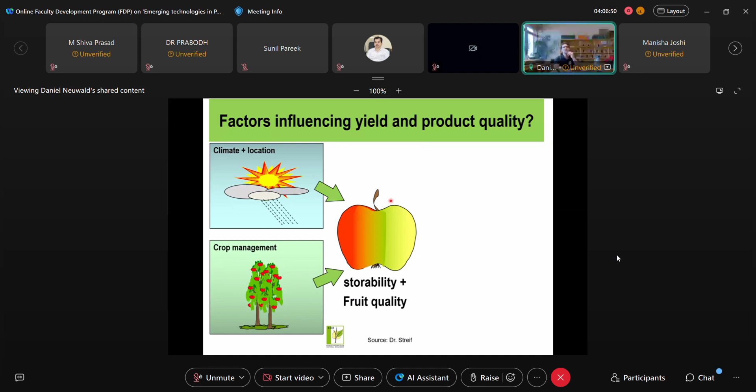What influences the fruit quality is the crop management, for example pruning, fertilizing, etc. This is a point I will not come into details about.

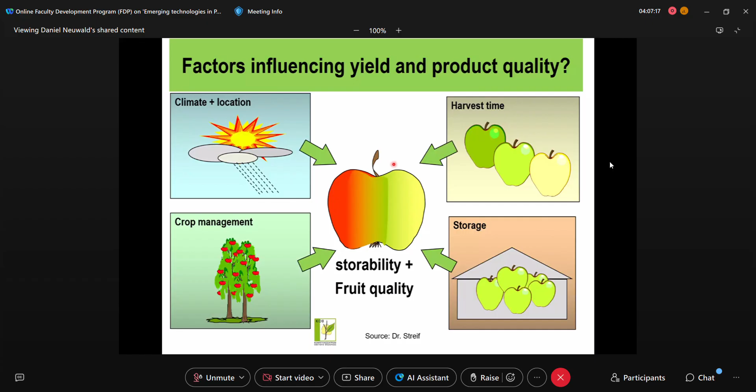The other point that is very important, and that I will touch a little bit on in the next slide, is the optimal harvest date. And the point I will concentrate more time on is the storage condition. The optimal harvest date is essential for fruit quality and storability.

To understand the optimal harvest date, we have a connection between two lines: that is the fruit quality. If we delay the harvest date, this curve increases, as you can see here. On the other hand, if we look at storability, if you delay the harvest date, it will decrease. And here is the open question.

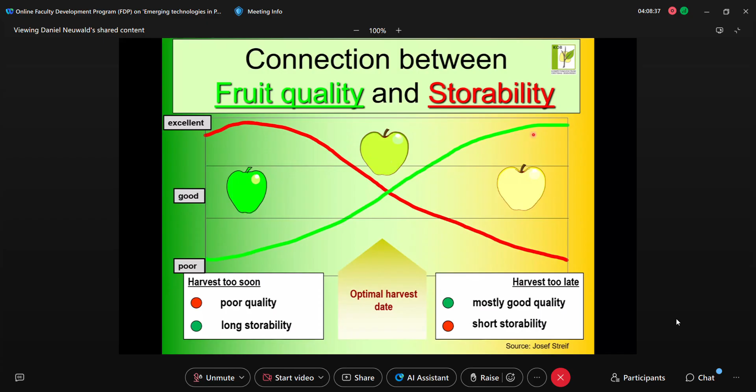What we like to make with our product is processing, then storability is not so important, and we can delay the optimal harvest time. On the other hand, if we like to store the product to have fresh fruit during the whole year, then we need to find a compromise between these two lines. The optimal harvest date is this compromise, depending on what we like to make with our product.

For apple, we have different parameters that we can use to determine the optimal harvest date: firmness, the starch pattern, and also the total soluble solid content. There are other factors, but I concentrate on these three because from these we can calculate the Streif index. This index is mostly used here in Europe, and is the firmness divided by starch pattern divided by total soluble solids. The lower this value, the riper the fruit.

This value can vary a little bit between year to year, or to region. But if you calculate this index, you will get more constant results than if you use individual parameters.

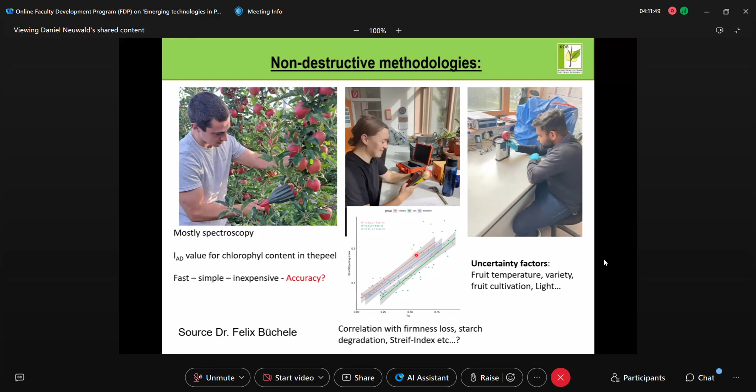The factors that we can change during storage can reduce this process. If we use low temperature, low oxygen, higher CO2, we can reduce the synthesis and also the reaction. We can also use MCP, which is a blocker of the ethylene receptor, but I will not go into detail on this point.

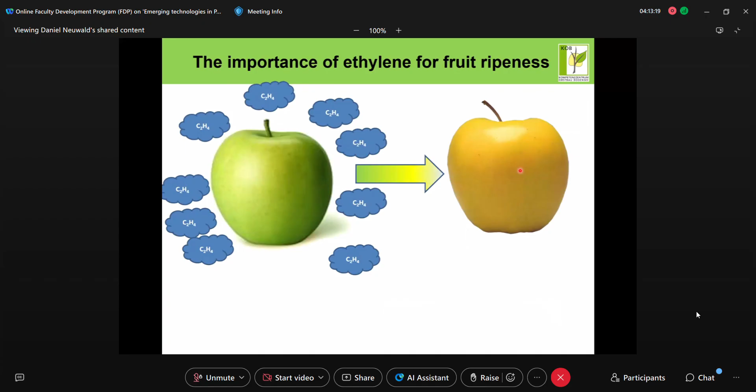Here you can see one illustration in my slide about the importance of ethylene. Ethylene is a plant hormone that is produced by the fruit, and if the fruit produces this ethylene, then it will ripen the fruit. What is important is the timely harvest and appropriate storage conditions that delay the synthesis and action of ethylene.

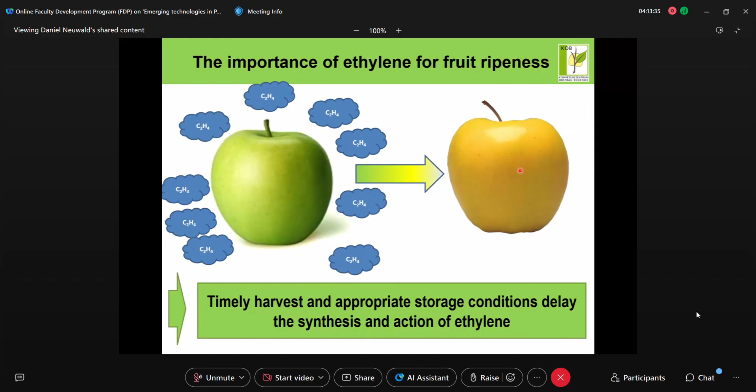Now we come to the topic I'd like to explain in the next slide: fruit storage. To start, I'd like to remember that apple is also a living product after we harvest the fruit. The apple can respire, produce heat, lose water, fall ill, and die. The activity in post-harvest physiology and technology is to reduce this process and to maintain the best fruit quality possible by reducing this process we see here: respiration, heat production, etc.

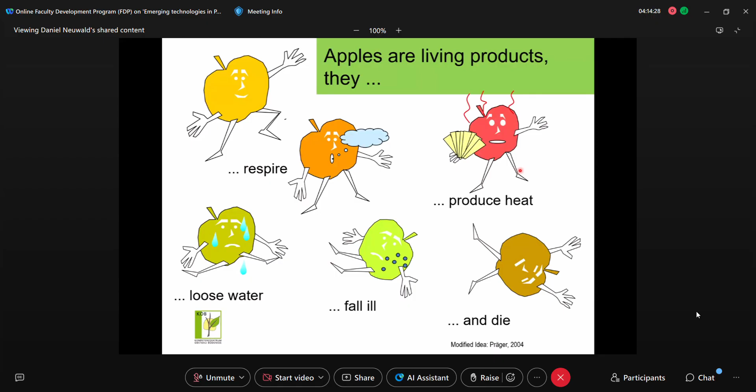What are the storage factors influencing storability? I told before that we can use, and for me the most important is, the appropriate temperature.

Additional to the temperature, we can use ventilation and humidity or humidification. These factors have an interaction with the water. And additionally, we can change the atmosphere: reduce oxygen, increase carbon dioxide, in some cases eliminate the ethylene, or use the ethylene blocker 1-MCP, or, I think the program will also talk about jasmonate, but I will not talk about it in my presentation.

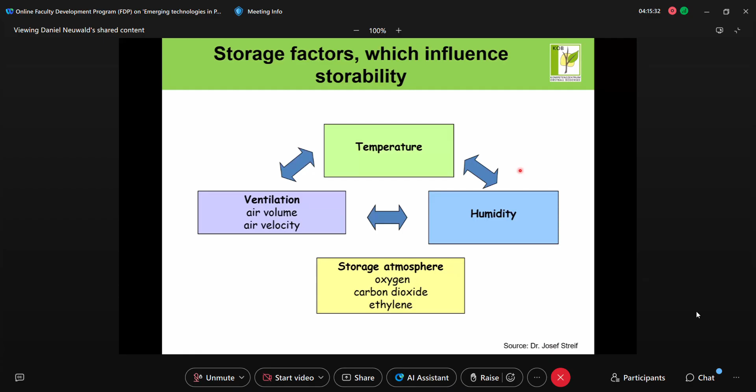Which of these factors we use depends on the time that we like to store. Because if I store the fruit only with cool storage and don't change the storage atmosphere, then I can store a maximum of 3 to 5 months, depending on the variety, if it's apples. For longer, we need more.

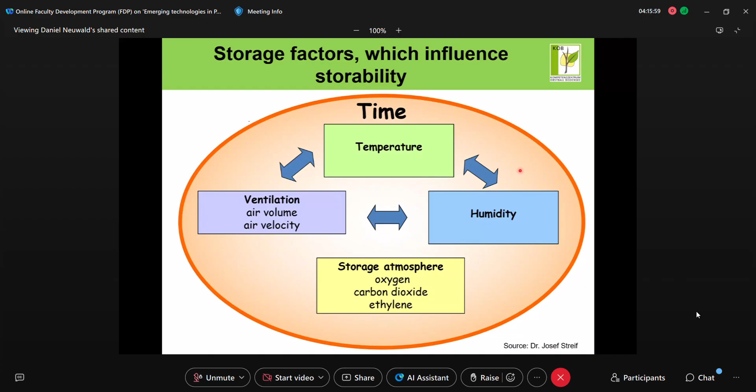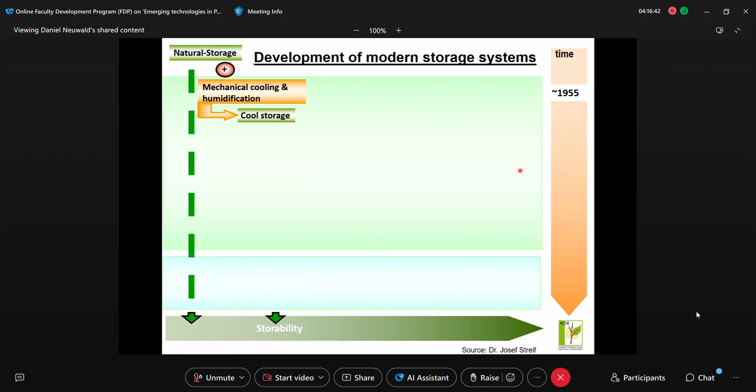Here I tried to show the development of the modern storage system. If we think of our ancestors, they also stored fruit or vegetables based on empirical results, and it was natural storage in the room that had the coolest temperature, or some place that tried to keep this fresh temperature. Then we have one storability. Around 1955, we have the development of mechanical cooling and humidification, then cool storage started. And you can see here, it improved the storability.

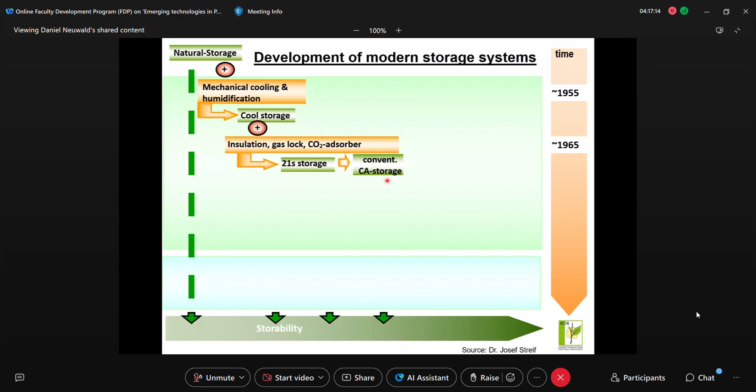Some years later, 1965, with improved insulation, gas-tight rooms, CO2 adsorbers, we have the conventional CA, classified as 3% oxygen, 3% CO2, then we can improve the storability of this fruit more. Then around 1990, with the development of nitrogen separators, electronic measurement and control devices, we get ULO, the ultra-low oxygen storage.

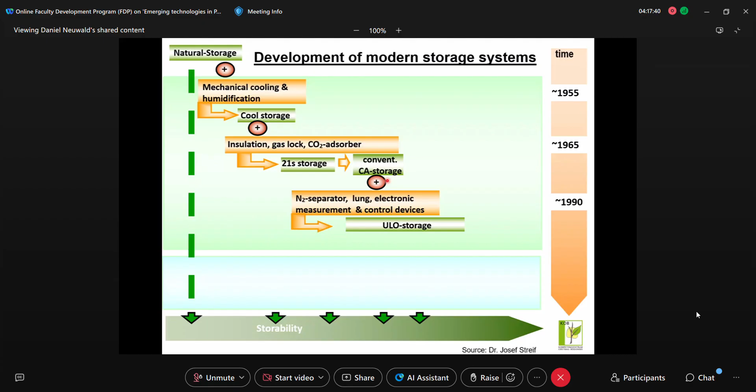Until now it was only static storage conditions. After 2005, we have the dynamic. We try to make an interaction between the fruit and the management of the storage facility. And for this, we can use ethanol or chlorophyll sensors, respiratory quotient, or CO2 measurement. And this is the dynamic controlled atmosphere, which I will go into more detail on in the next slide. With all of these methodologies you can also use 1-MCP, which can reduce the synthesis and the action of ethylene.

I said that the most important is the refrigeration, and here in Europe we have a change in the rules, and we need to evaluate refrigeration solutions that have low global warming potential. That is CO2, propane, and ammonia. I think you have one more synthetic product, but this is also with freon, and that is more damaging to the environment. And this is what the European Union wants to reduce.

And what we do in this project is compare the different systems, CO2 and propane, to the regular one used in our region, that is freon with 134a. We have different rooms here, and each room has a different system to see how the quality is maintained and also the cost of energy, maintenance, etc. CO2 is a very interesting refrigeration solution, but for very low temperatures. In the range for apple storage, from 1 to 3 degrees Celsius, it is not the most appropriate, and this we have also investigated. Propane and ammonia need to be used with indirect cooling, and this also loses a little bit of efficiency.

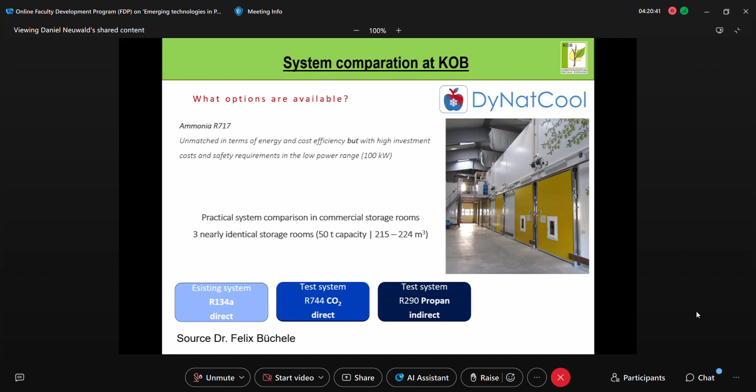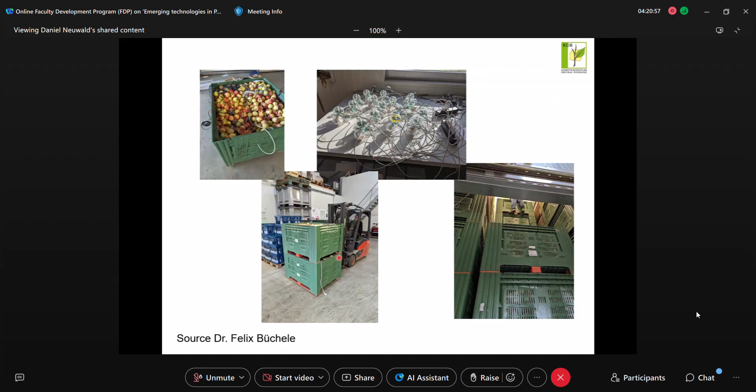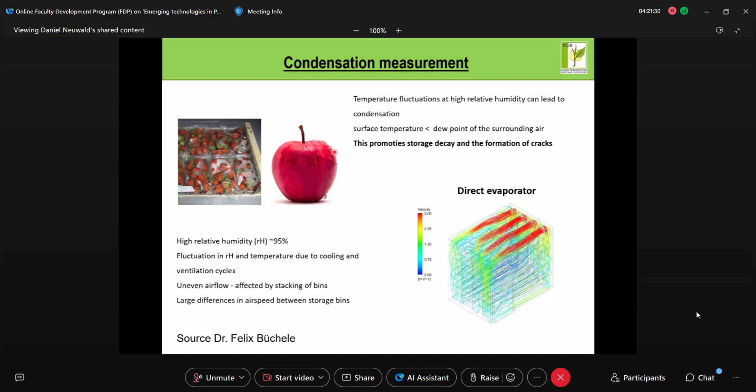Yeah, in this project, just to see, we have a lot of sensors. You can see how much activity we need to do to get all of these results and comparisons. And here, one aspect that we also investigate is condensation measurement. We have fluctuation in the temperature, and with very high humidity water can condense on the fruit, and this is an appropriate condition for the development of fungal disease, and this needs to be reduced. It is also an effect that we tried to investigate in this project. Here, just to see how creative research needs to be, the best sensor is to use the apple as a wetness sensor, with fruit surface temperature, ambient temperature, air speed loggers, and here you can see how we did it in this project.

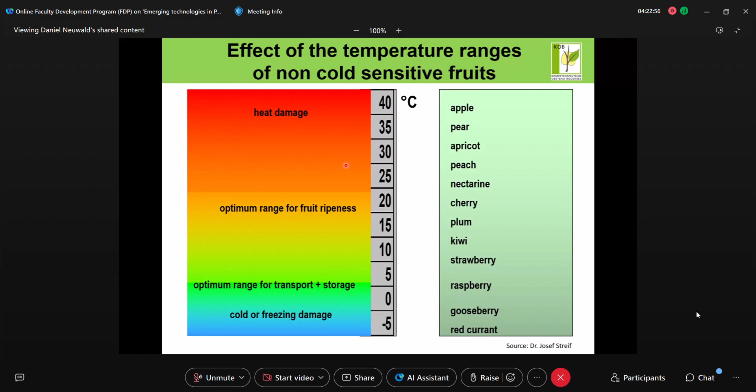Yeah, the effect of the temperature: we can look at the appropriate temperature, but what is an appropriate temperature for non-chilling-sensitive fruit? Here I put a list of non-chilling-sensitive fruit. What will happen if we store the fruit around 40 degrees Celsius? There will be heat damage. If we store between 15 and 20 degrees Celsius, that is the optimum range for fruit ripening. 0 to 5 degrees Celsius is the optimum range for transport and storage. And if we go further down in temperature, then cold or freezing damage can come.

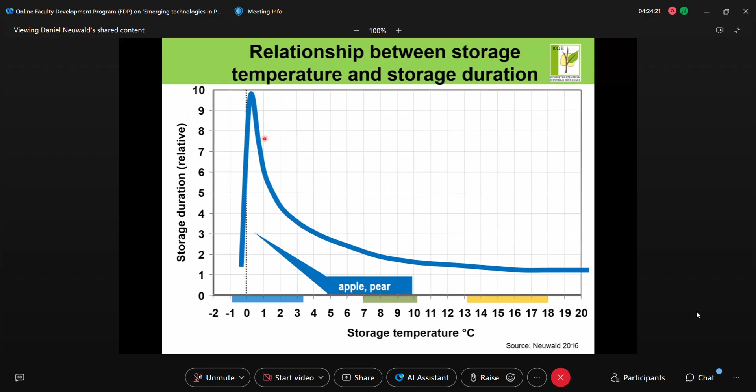Here is the relationship between storage temperature and storage duration. If you reduce the temperature, for example in apples and pears, you can see that it increases the storability of this fruit until one point, that is the maximal point, and then it falls down because it starts the chilling damage or freezing damage.

For fruit like guava and avocado, it is a similar curve, but the appropriate temperature is around 7 to 10 degrees Celsius. For mango and banana it is higher, but also a very similar curve.

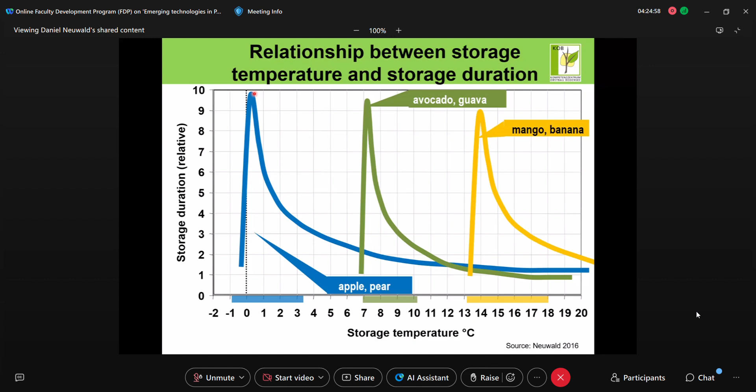What is necessary to use controlled atmosphere, which is the technical equipment for a CA room? First we need the fruit, which you can see here. We have here the ambient condition, around 21% oxygen, 0.03 or 0.04% CO2, and the rest is nitrogen. We need a refrigerating and cooling system.

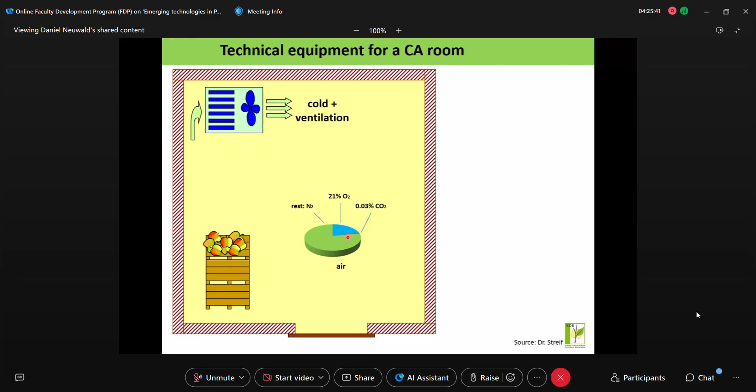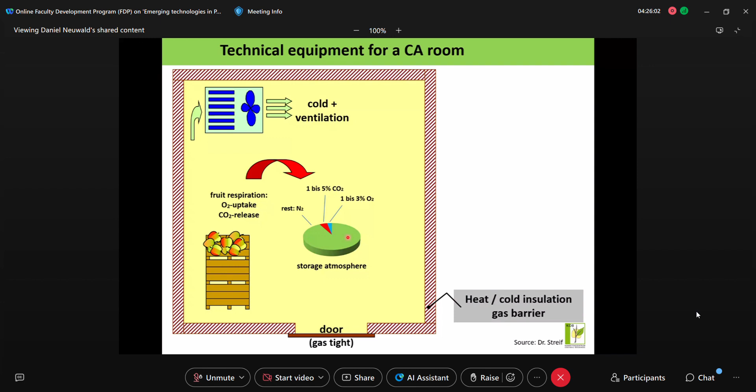Also the fruit respires and changes the atmosphere, and here we can see that we need gas-tight doors, heat and cold insulation, a gas barrier in the walls and in the ceiling or floor. We need some measurement instruments like oxygen and CO2 gas analyzers, sensors like humidity and temperature sensors, the valve and lung for pressure compensation, because if we cool, there will be a depression.

And if the fruit gives off warmth and the air increases in temperature, we can have a higher pressure that can implode or explode the room. The lung is also one part where we can save the air from the room, so that if you have this expansion or compression, the air is saved in the lung before the fresh air comes in.

The fruit will respire more than the optimal condition, for example 1 to 3% or 5% CO2; if the fruit respires more, the CO2 that is produced in excess needs to be absorbed. And also the nitrogen separator, to reduce the oxygen or to maintain a little bit higher pressure, is necessary in some cases in DCA.

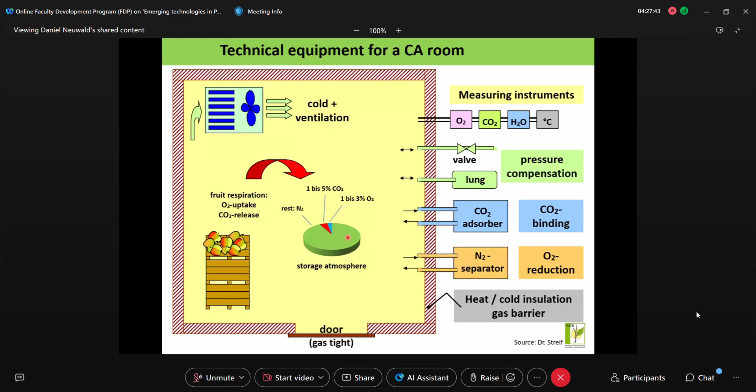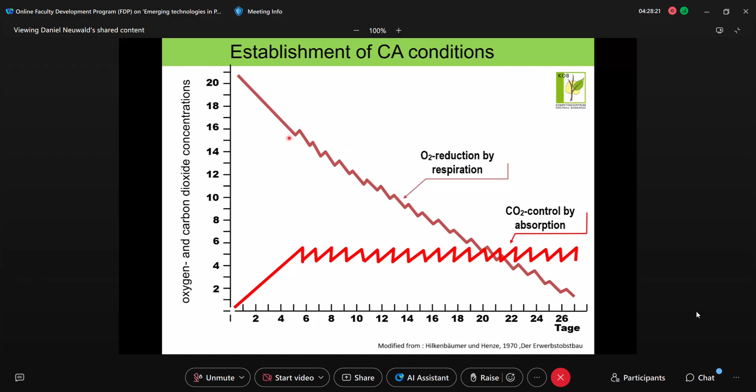Here you can see the establishment of the CA condition if the fruit goes only by respiration, and you can see that it will have a duration of around 26 days. You see this behavior in the line because when the CO2 absorber starts, every time a little bit of oxygen comes into the room. If we have the possibility to make the pull down with the infusion of nitrogen, we can reach the optimal CA condition in around 1 week.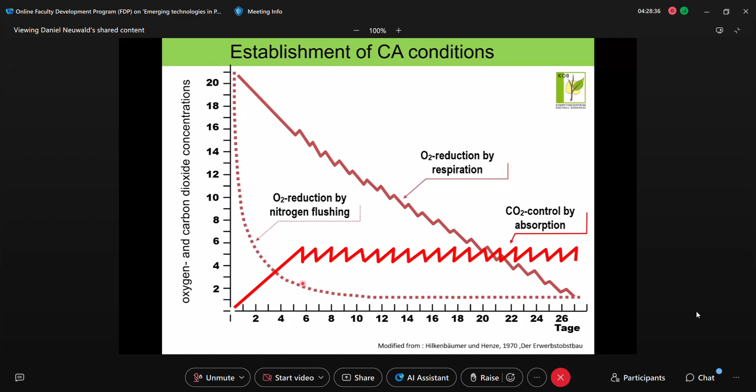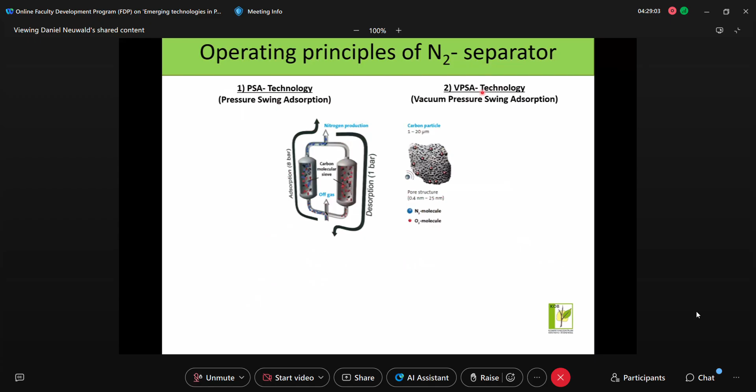Here, how do we produce this nitrogen? We can get the nitrogen from the atmosphere and separate the nitrogen from oxygen and also water vapor. We have the system with pressure swing adsorption, or the second system is with vacuum. A third system is membrane separation, where the air comes in here, the nitrogen is retained by the membrane, and the oxygen and CO2 can go outside the membrane.

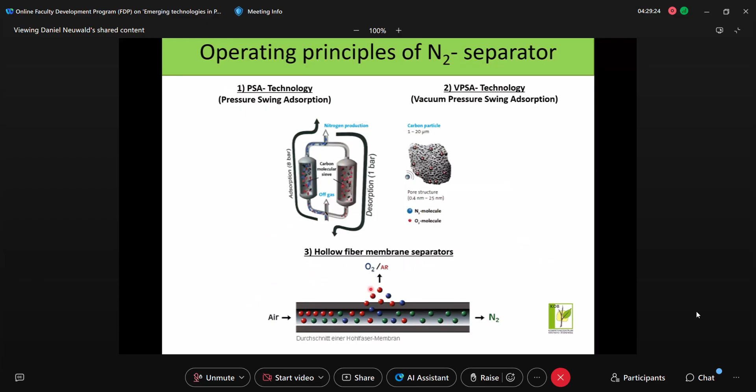Here maybe you can see, I hope that you can show it, no.

Here is how it works: the air comes with a higher pressure, 8 bar, then it is separated and the oxygen is retained in the carbon. And here we have the nitrogen production that we can inject in the room. Then this carbon will be saturated, and the system changes. Here it will be with low pressure and here with higher. Then this one will be regenerating and the second system will produce. You can see the oxygen that was in this column comes down and out here.

The similar process is also in the CO2 adsorber: CO2-enriched air comes here from the storage room, the CO2 is retained in this column, and then fresh air comes out here.

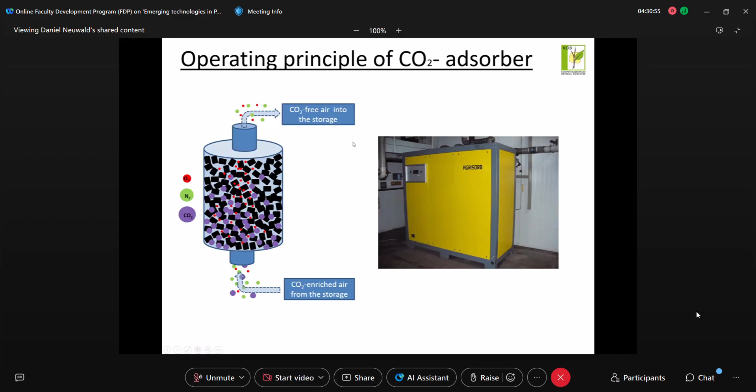One alternative system is to use hydrated lime, and the disadvantage of this method is that at the end of the storage, we have the lime as waste. Just to give you an idea, it is recommended to use 2% of the volume of hydrated lime; for one room with 100 tons of fruit, you need to put 2 tons of lime. Maybe you can later use it as a fertilizer, but you will need space that normally would be for fruit to put this lime, which absorbs the CO2 so it doesn't damage the fruit.

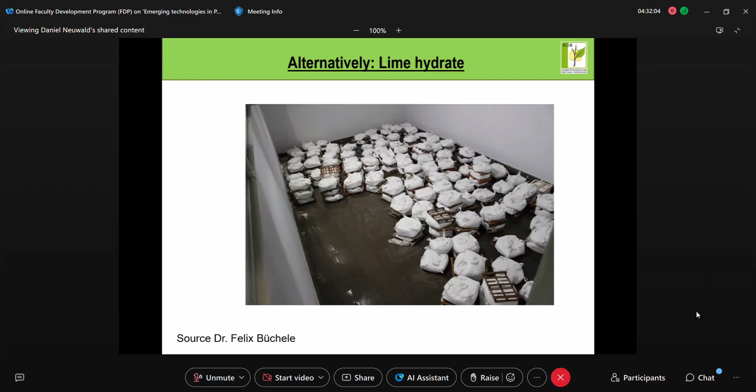Here I tried to show what we need in one modern CA storage with engine room. Here is the room with different sizes from 15, 16 and 100 tons. Here you need the air compressor, the tank for air, the PSA, the CO2 adsorber, the gas analyzer, and here the compressor for refrigeration.

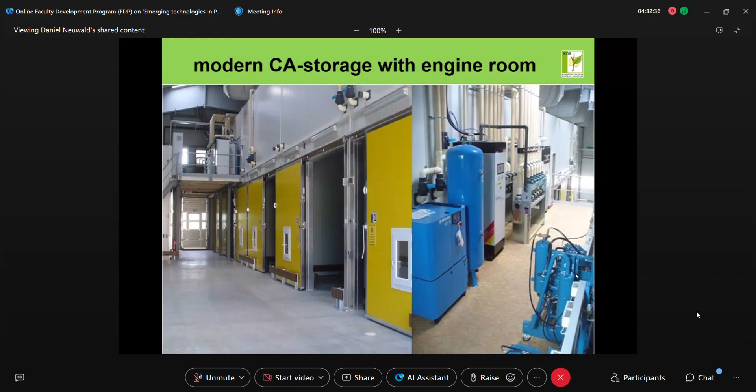One very important thing: for fruit, we can reduce the oxygen to reduce the respiration and so have better preservation of the fruit quality. For humans, this cannot be used. With the conditions that we use at the moment, 1% oxygen, or 0.5, or less, 0.4 in my rooms, people can die within a minute. This is one very dangerous problem.

Before you come inside the room, you need to bring fresh air into the room. Here you open this valve, you open this, and with ventilation the fresh air is brought into the room. First ventilation, not the internal ventilation, but coming from both sides. The oxygen inside increases, then open the room so you can come safely into the room and take the fruit. This is very important.

You may think, oh, why did Daniel explain this? Because every year I see in the news cases where people died in storage facilities or fruit storage facilities because they don't think that low oxygen can be a danger to life.

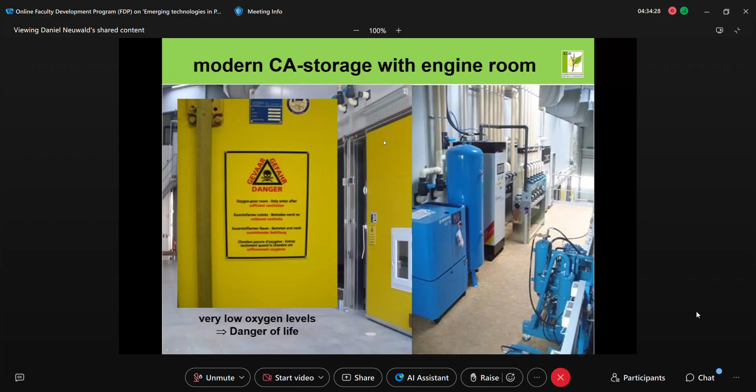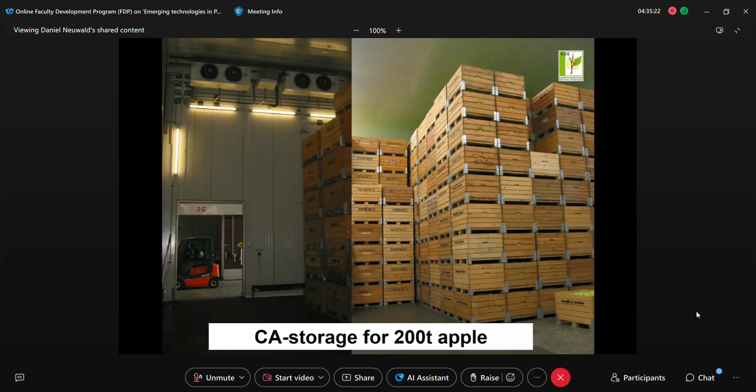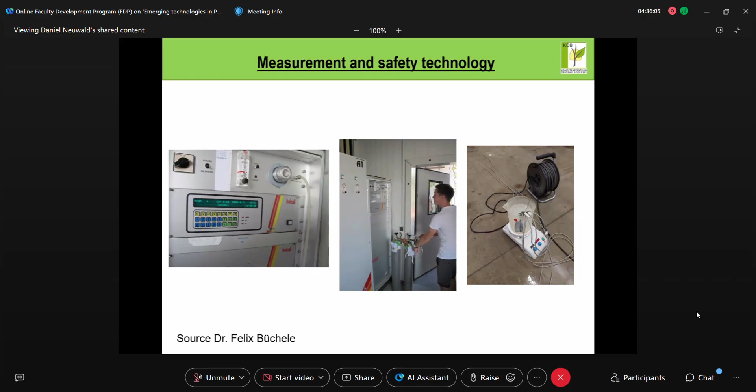Also, every day we need to check if we have the optimal storage conditions. In this case, 1%, 1.5% oxygen, 2.2% CO2, the temperature around 2 degrees Celsius here. And you can see that you have a small fluctuation from the refrigeration in the air. In the fruit, this will be more constant.

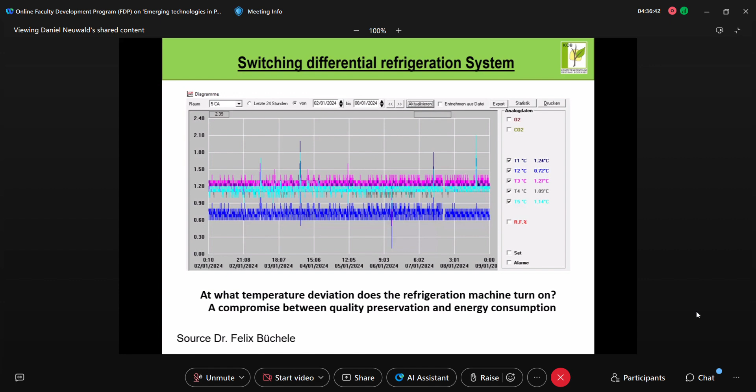For the next system that I will talk about, the DCA, we need to check how hermetic this room is. We put a pressure in the room, for example 10 millimeters of water column, and look at how long it takes to reduce this column. For DCA, we need a very hermetic room where this pressure drops very little, as you can see here in this graphic.

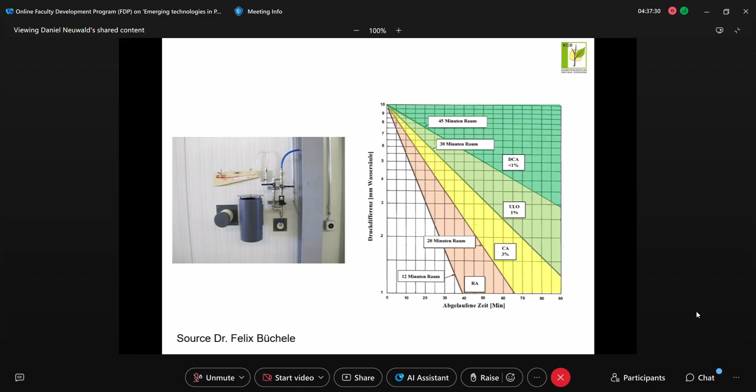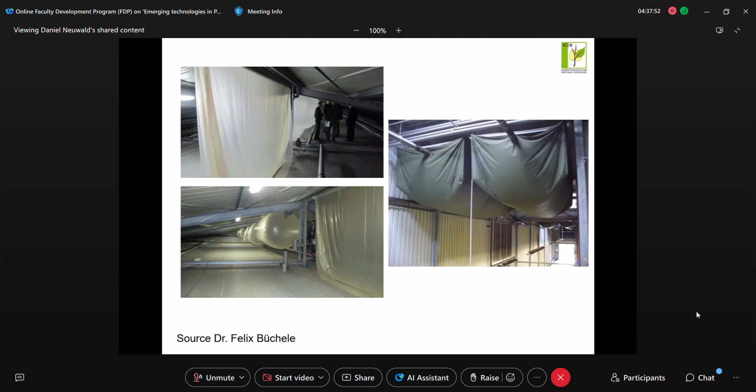I said that we need some valves, which you can see here. Here you see the lung, which is a safe place for the air atmosphere from the room so it doesn't go outside, and every time fresh air needs to come from outside, it comes first from this lung.

Here you can see the effect of the storage conditions on the respiration of apples. I put here 12 degrees Celsius in normal atmosphere conditions, because this is the condition in our region at harvest time. For example, in October we have an average temperature of 12 degrees Celsius. Maybe in India and Brazil it is higher, so the effect of the cooling system will be bigger. But if we reduce from 12 to 1 degree Celsius, you can see here that it greatly reduces the metabolism of the fruit and reduces the respiration.

If we change the gas concentration from normal air to 3% oxygen and 3% CO2, we reduce it more. If you use ULO, the respiration rate is reduced more. If you use ULO plus 1-MCP or DCA, it is reduced more and you have the best preservation of this fruit.

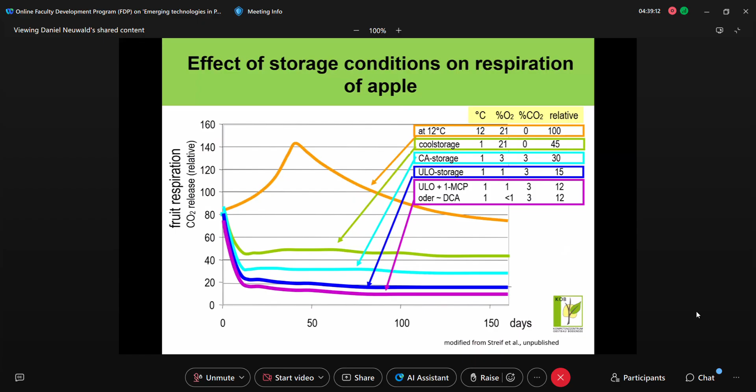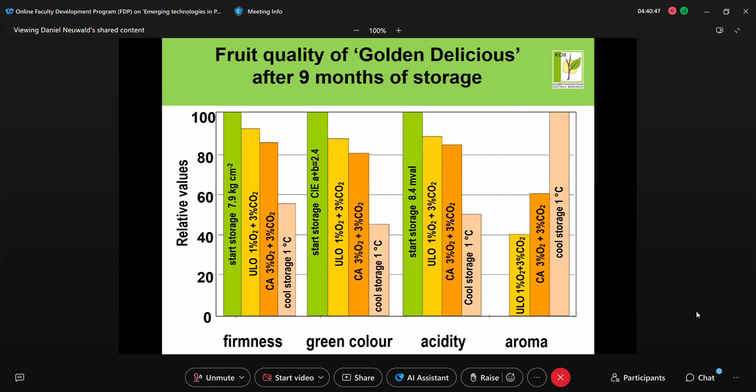On the other hand, as I learned in my time as a student, the more modern the technology, the better we preserve parameters like firmness, green color, and acidity. On the other hand, there is a loss in aroma production.

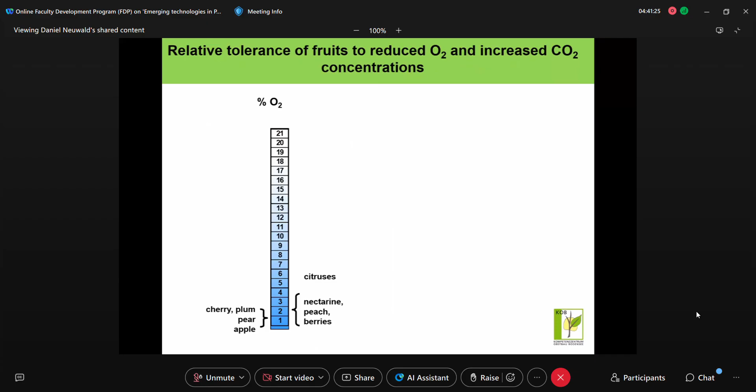Now I tried to make not only in apple but other fruit: the tolerance of fruits to reduced oxygen and increased CO2 concentration. I think for oxygen it is quite easy. For most fruit, we can store between 1 and 2% of oxygen. Citrus, I don't have so much experience, but in the literature I find between 5 and 6%.

For CO2, it is a little bit more complicated. We have, for example, apricot, pears, and Braeburn varieties that are very susceptible to CO2, and it needs to be reduced as much as is possible with the system, because damage to the fruit can come very easily. Some other varieties like Gala are less susceptible to CO2 and can be stored between 2 and 3%. Other varieties like Golden Delicious can be higher, between 3 to 5% CO2.

On the other hand, persimmon, avocado, mango, banana, we can store with 6 to 8 or 10% CO2. Other fruit like plums, strawberry, raspberry, blueberry, we can store between 10 to 15% of CO2. And other fruit like red currants and cherries, we can be very close to 20% of CO2.

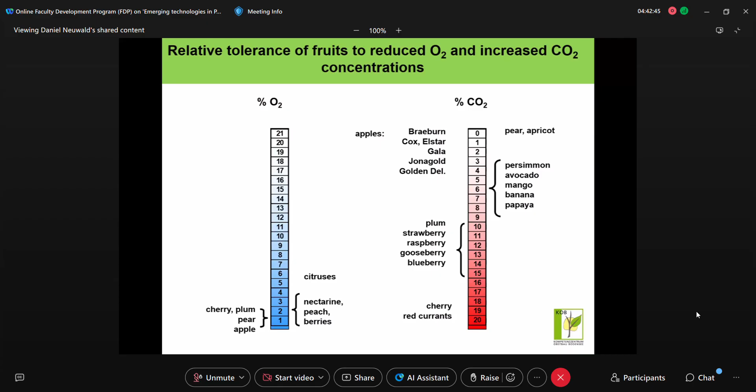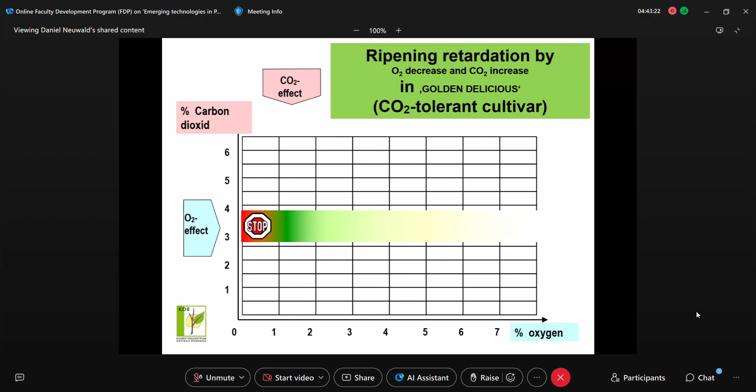How can we make this recommendation? And here I made one graphic. If we make a lot of experiments with different conditions, and if you reduce the oxygen concentration and evaluate the fruit condition, you can see yellow or white doesn't have an effect. The green is the best effect, and the red is the point where damage can start. The same for CO2, and this combines the oxygen and CO2.

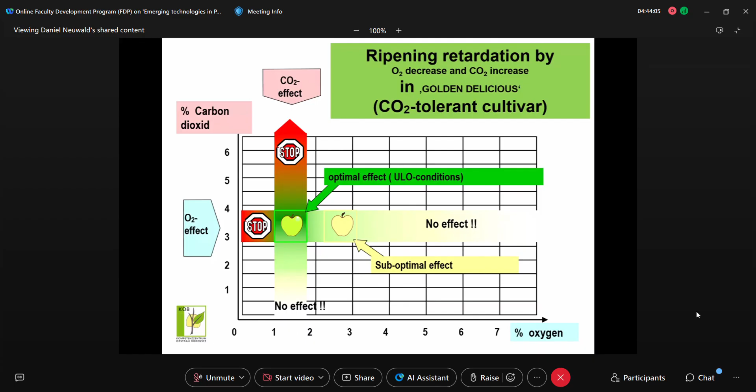For example, in this case, 1 to 2% of oxygen and 3 to 4% CO2 is the optimal condition. If we have different conditions, either there is no effect, or a suboptimal effect, or damage in the red part, but what is important is the optimal effect, for example, for ULO condition. And this will give the best preservation of the fruit quality or the storability of this fruit.

Now to start the dynamic controlled atmosphere. First, how was storage in CA until now, or some years ago? The optimum storage conditions are determined in multiple years of experiments. With this experience we make one recommendation. It will be one constant storage condition regarding oxygen and carbon dioxide during the total storage season. But here we have a conservative condition. We have a safety margin. If we make some mistake and this is not seen quickly, then the damage doesn't come very quickly.

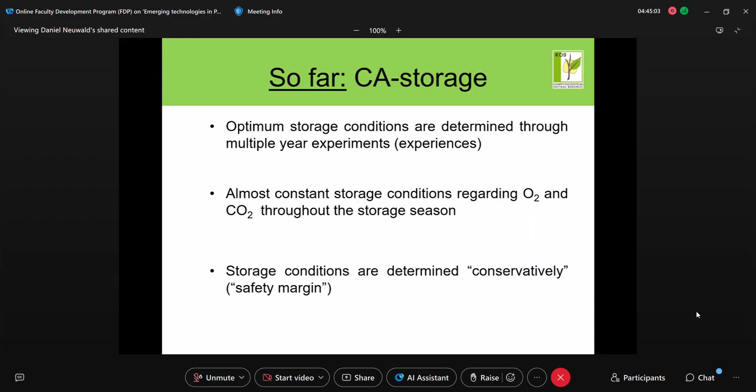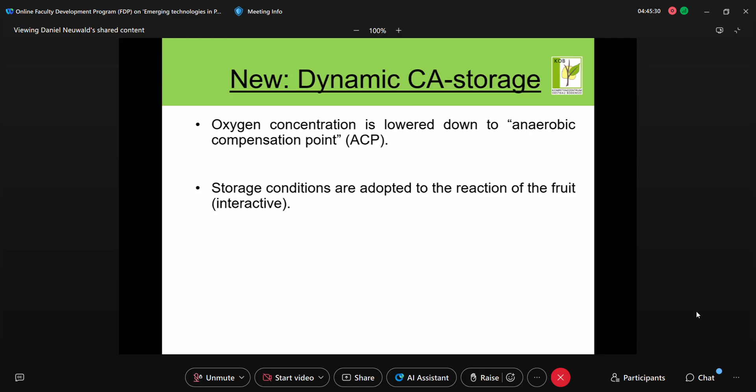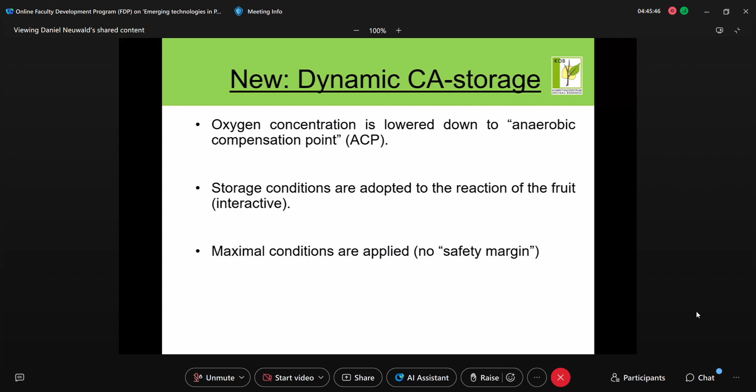What is new in the dynamic controlled atmosphere? The oxygen concentration is lowered down to the anaerobic compensation point. I'll be explaining it in the next slides. The storage condition is adapted to the reaction of the fruit. We try to make a dialogue, a conversation between the fruit and the storage manager. We apply the maximal condition and don't have a safety margin. We need to have more control of the storage condition.

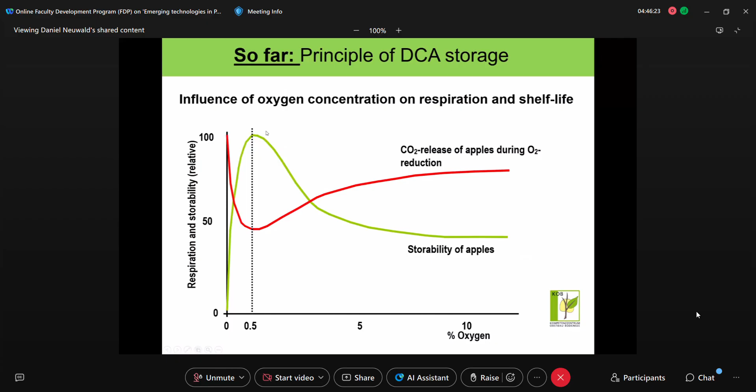Here, to understand the anaerobic compensation point: if you reduce the oxygen concentration, we reduce the respiration or the production of CO2 until a minimum, and then it starts to increase very quickly. The storability of the apple will be increased if we reduce the oxygen until a maximum, and at this maximum it then falls down very fast. This maximal storability and minimal CO2 production is the anaerobic compensation point, where aerobic respiration changes to anaerobic respiration. And if you get a concentration lower than this anaerobic point, then damage comes.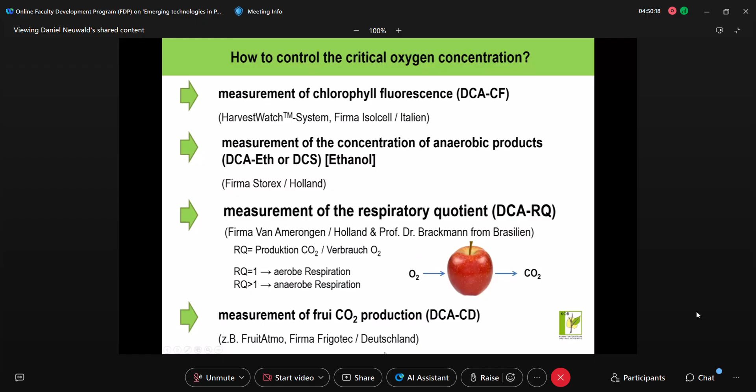How is the concept of DCA storage? How is the DCA with the chlorophyll fluorescence? We have the fruit, we put this fruit in the storage and put in these sensors. The sensor has here one light, and here the chlorophyll fluorescence sensor. If the fruit is normal, doesn't have stress, one signal comes, and the fruit is normal.

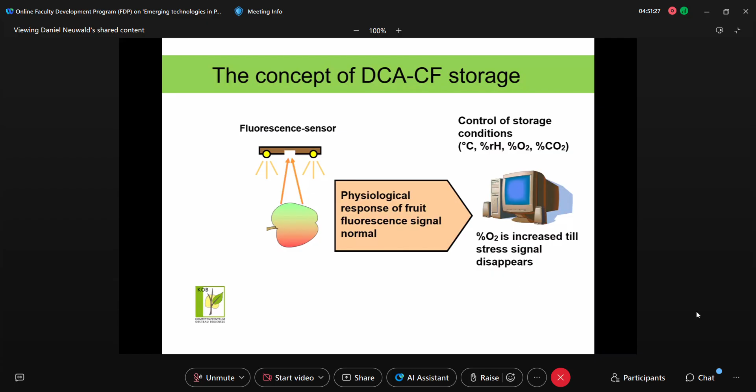Then it continues to reduce and a stress comes, an anoxia. Then the chlorophyll fluorescence will be altered. This comes into the system, and then we increase a little bit the oxygen condition in the storage, and then this stress signal disappears. And then it's normal. And then we can wait and repeat this system, or we say this is the point that I like to store until the end.

What is the chlorophyll fluorescence? It is the emission between 690 to 730 wavelength. And how can you imagine this? Here the paper from Prange, but if you have a reagent glass and put a chlorophyll extract and put one light, like in the system here, and you see this red reflected light, this is the chlorophyll fluorescence. This is what will be measured.

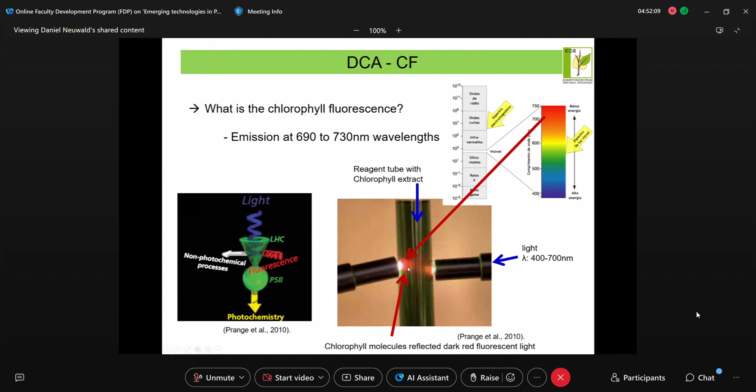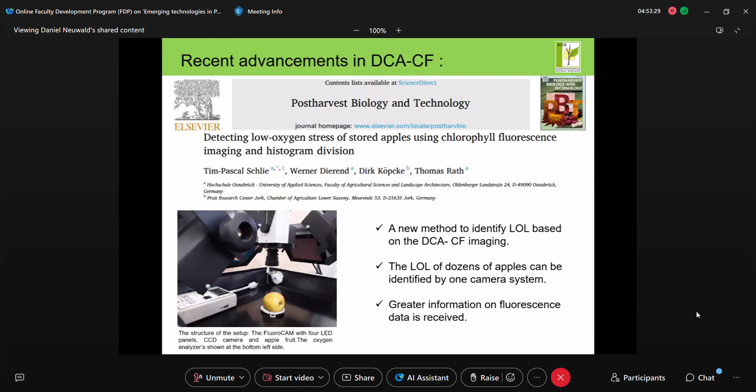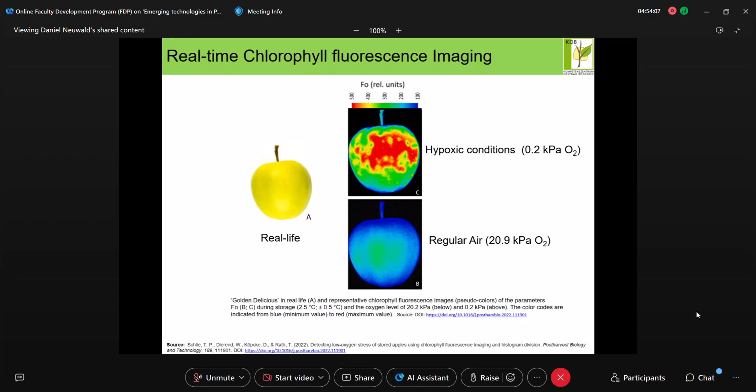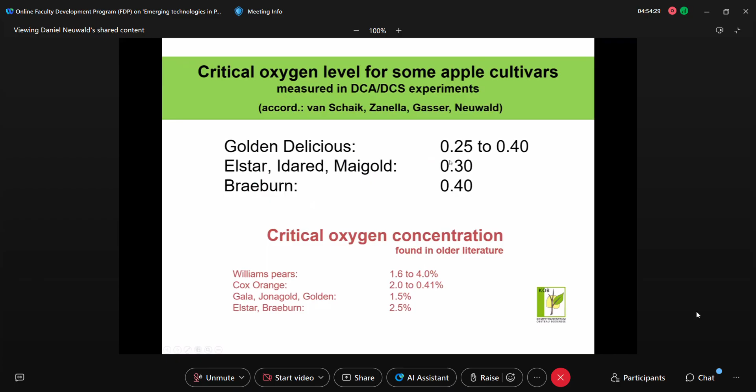Another system, the ethanol system, I got from Van Amerongen, from the Netherlands, where the rooms are connected with one box that has similar or identical conditions, and at some moment it will be closed in connection with the normal room to look at how much ethanol will be produced in this room. And if the production increases, the ethanol is the information of the moment that the fruit has stress, and then we need to increase the oxygen condition.

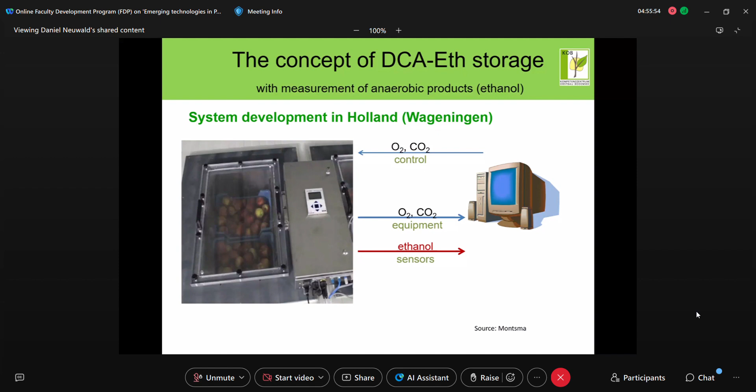The other principle of DCA I put is the respiratory quotient, and what we need to measure, with the CO2 absorber and oxygen injection stopped during the first and the second measure. And then we have from first to second measure one difference. In this case, the CO2 was 0.4 and the O2 0.2. And then if you divide 0.4 by 0.2, we have a respiratory quotient.

If the respiratory quotient that I like is 1.5, then I need to reduce the anaerobic respiration. So I need to increase the oxygen a bit. Not 0.7, but maybe 0.8. If I like one respiration,